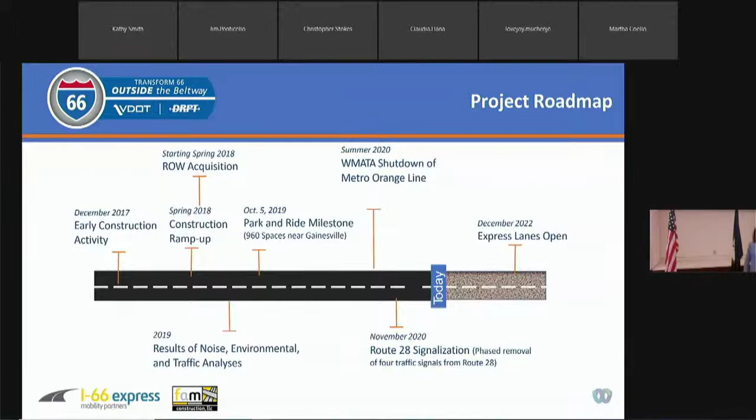We're also improving bike and pedestrian crossings across this bridge. We're building this bridge in two phases to be able to maintain traffic throughout construction. The first phase of the new bridge opened to traffic in November of last year. Then shortly thereafter, this past winter, we began demolition of the remainder of the old bridge. Construction of the rest of the new bridge is underway, and we anticipate completion by spring of next year.

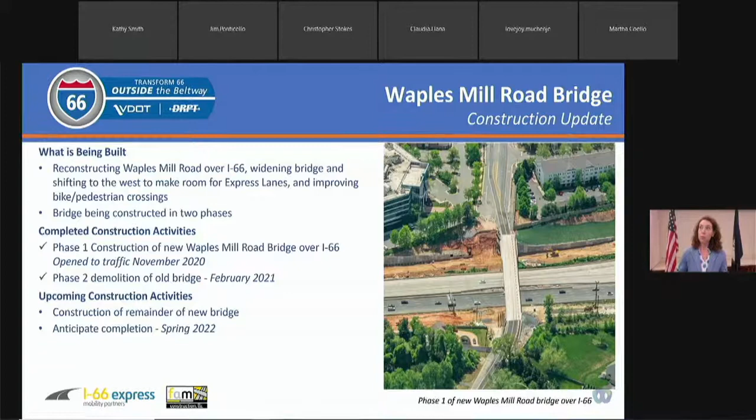Just to the west is the Route 50 interchange, and you may have heard news about this interchange over the weekend. If you live around this interchange, you'll want to call special attention to many of the changes that have recently been implemented.

But first, as an overall, we're looking here at the image of two new Route 50 bridges over I-66. The image you see is looking towards the south over top of I-66. We're reconstructing the entire interchange, shifting it slightly to the east, and accommodating the widened highway underneath, as well as new ramps to and from the express lanes.

So far, as you can see in the picture, we've constructed new bridge decks over I-66 and are working to shift the roadway alignment for both Route 50 East and West. Just this past weekend on Sunday, we opened up the new Route 50 West Bridge to traffic.

And then beginning tonight, as an upcoming construction activity, we will begin demolition of the old westbound bridge. In a couple weeks, around July 10th, we will shift traffic on the Route 50 East bridge to the new traffic pattern, and then begin demolition of that old bridge.

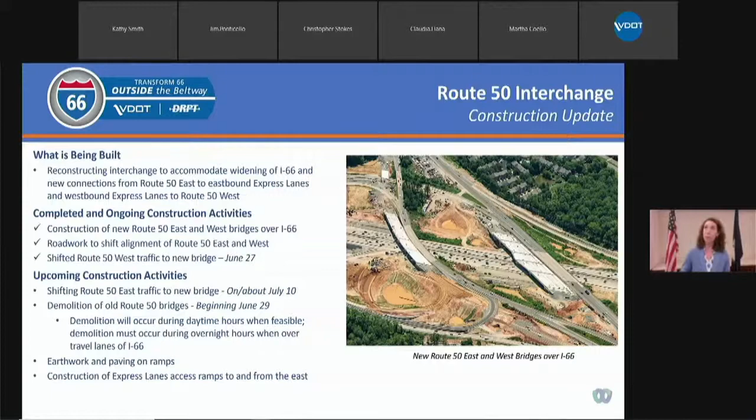Moving west at Monument Drive, prior to the project, the ramps to Monument Drive from I-66 were HOV-only ramps. When the project is complete, we'll be opening Monument Drive to full-time express lane access ramps, both to and from I-66 east and west. Additionally, Fairfax County, with project concession fee funding, is also building a new parking garage on the south side of I-66, just next to Monument Drive Bridge.

In the photo you see here in the center, on the lower half towards the bottom of the picture, is Fairfax Corner shopping area on the south side, and the ramps you can see in the center of the screen heading to I-66 east and from I-66 west.

To add the new access ramps on the west side of the bridge, we are expanding this bridge. You can see in the picture on the west side, or the left-hand side of the bridge image in the center, the beginnings of new bridge foundations on the outside of the highway.

Upcoming activities you'll see in this area are continued construction on those new bridge abutments, but the remainder of our work to widen this bridge will take place after we've shifted traffic on the general purpose lanes through this area this coming fall.

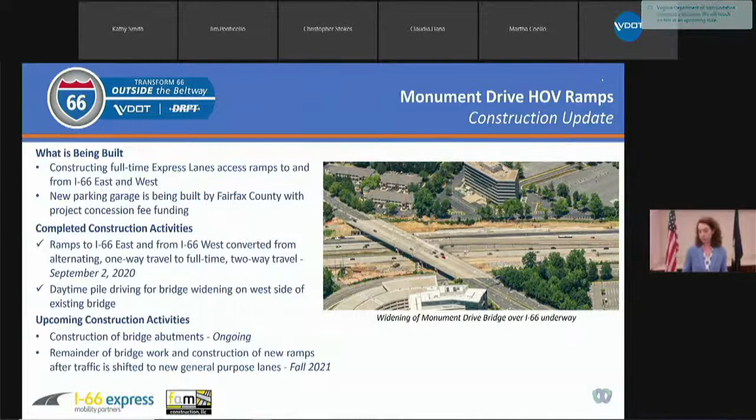At the Fairfax County Parkway, the image you see here is driving under the I-66 bridges over top of the Fairfax County Parkway. We are expanding the I-66 bridges that run over the Fairfax County Parkway.

Prior to current activities, we did partial demolition of the outside portion of those bridges. We've constructed new foundations for the widened bridges and set beams for the new bridges. Going forward, we'll continue work on the new bridge decks in preparation to shift traffic on I-66.

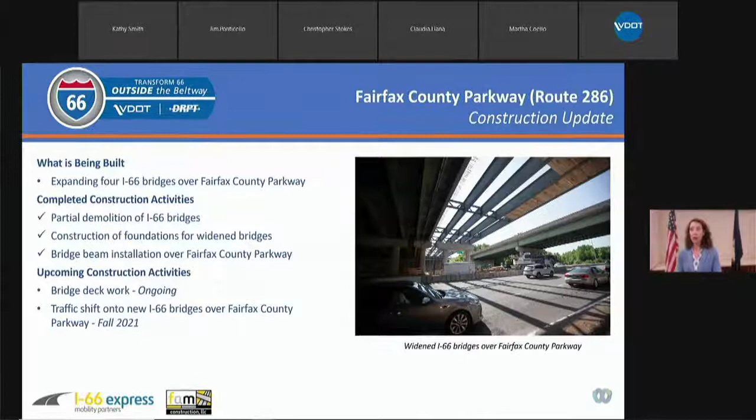At Stringfellow Road, the image you see here is looking towards the north.

You may recognize the park and ride lot at Stringfellow Road, off to the upper left-hand side of the bridge for orientation. You can also see, parallel to I-66, the makings of two new bridges over Stringfellow Road. We set these bridge beams over this winter and spring, and deck work is well underway here.

For this crossing of I-66, we are pushing I-66 out to make room for new express ramps to and from the east and the center median, as well as to make room for future transit down the center of I-66.

Upcoming activities you'll see in this area over the coming months: as these bridges are completed, we will begin to shift traffic on I-66 east and west onto these new outside bridges in the late summer and early fall timeframe. Once we shift that traffic, we'll then begin to demolish the old bridges.

As with Route 50, this demolition work will need to occur during overnight hours when we are working directly over the travel lanes of Stringfellow Road. As with all our demolition activities, we'll do public outreach prior to the start of demolition so that neighbors living in the vicinity are well informed beforehand.

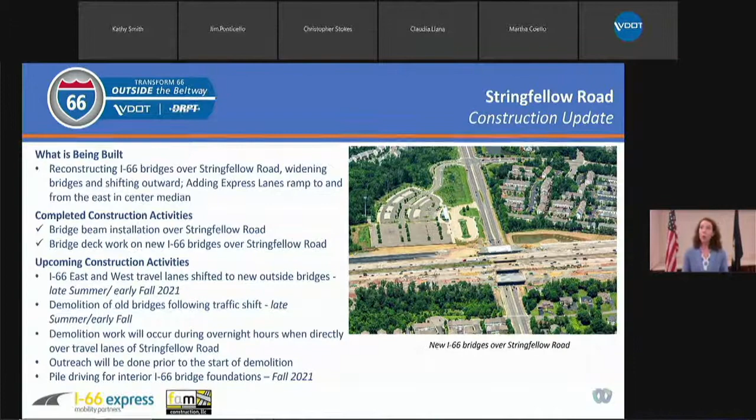At the Route 28 interchange, probably one of the most complicated areas of the project, we call this our mini mixing bowl for those of you familiar with other parts of the region. Here we are reconstructing the entire interchange to accommodate new connections for the express lanes and the widened highway.

As Susan mentioned, we met some major milestones last fall with removing the traffic signals, the 4 remaining traffic signals along this portion of the 28 corridor. In order to remove those signals, we opened up several new ramp movements to provide new access.

In general, we opened up new access from I-66 East to 28 North, from 28 South to I-66 East, opened a new ramp from I-66 West to 28 North, and also opened the new Braddock Road, Walney Road overpass and ramp from I-66 West.

This past spring, we partially demolished the existing Route 28 South Bridge over I-66. And just this past weekend, we opened the new permanent ramp to I-66 West from Braddock Road and Walney Road, along with some additional movements for Walney Road.

I'll go through those in more detail in a second, but I want to point out some upcoming construction activities that will be noticeable as you travel around this interchange, or for those who live in the vicinity. This summer, we will begin to install bridge beams and start construction of the new 28 South collector distributor lanes over I-66.

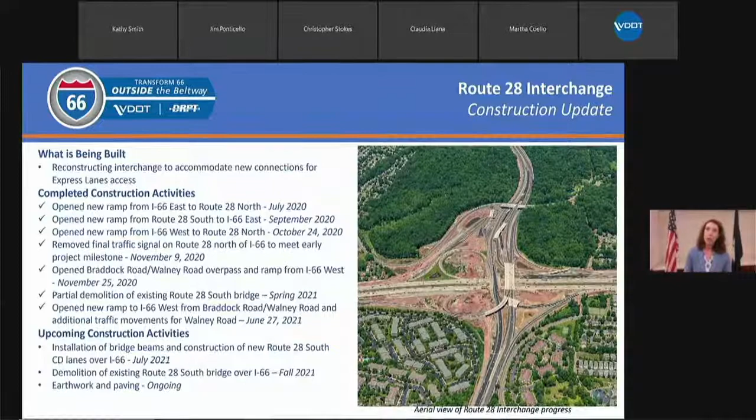I mentioned some new traffic patterns and new movements that began this past weekend on Sunday, the 27th, for Braddock Road and Walney Road. We activated 2 new traffic signals on the Braddock Road, Walney Road overpass, and that allowed for new movements to occur. The first is that we were able to open the new permanent ramp to I-66 West from Braddock Road and Walney Road, so that's new access for Walney and Braddock Road drivers.

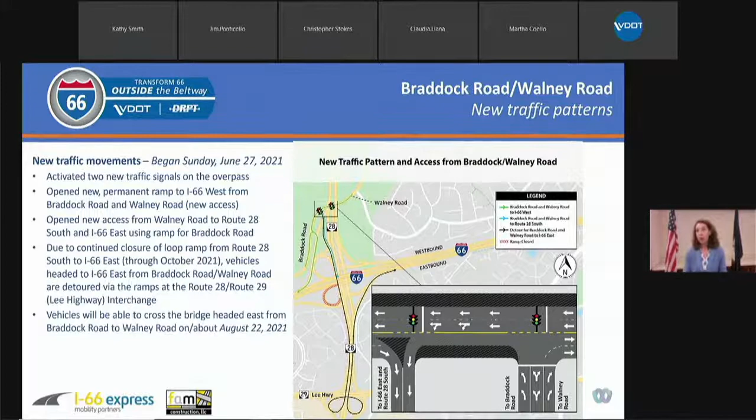Here, that detour I just mentioned, you can see in a bit more detail. We have temporarily closed the ramp from I-66 West to Route 28 South, beginning this past Sunday. This closure will allow for construction of the new permanent ramp, and during this closure, we're directing traffic to take the exit from I-66 West to Braddock Road and Walney Road.

Make a left at the traffic signal at the top of the ramp, stay to the left, and then make a left at the second light onto Route 28 South. The ramp from I-66 West to Route 28 South will reopen on the weekend of August 20th.

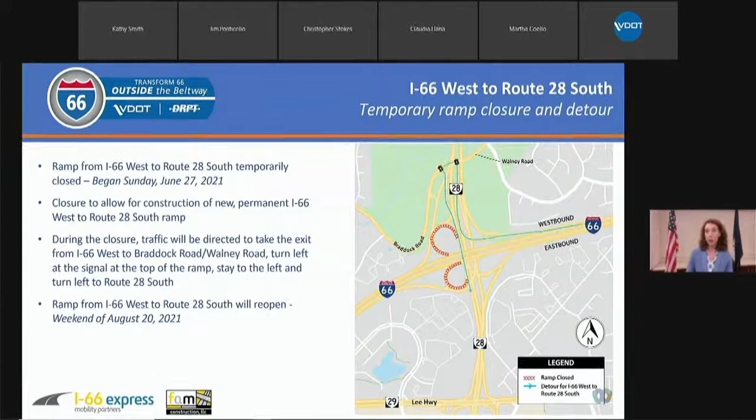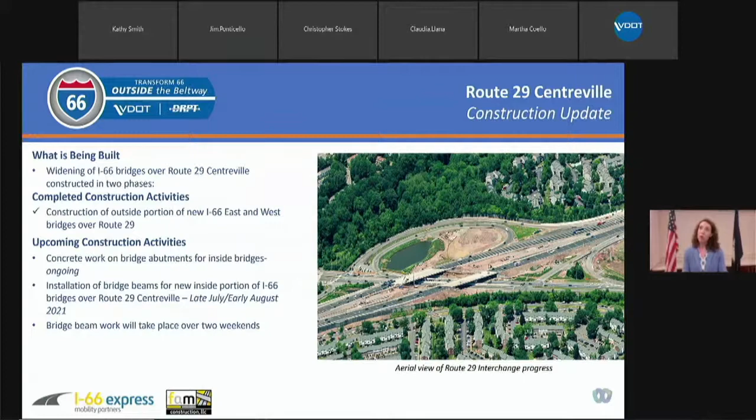At Route 29 in Centreville, we're widening the I-66 bridges over Route 29, constructed in 2 phases to maintain traffic on I-66. We're also expanding I-66 to make room for future transit in the center median of the corridor. Construction of the outside portions of the new I-66 East and West bridges over 29 was completed, and traffic was shifted onto those new bridges at the end of 2020.

Currently and upcoming, we're continuing work on the inside bridges, and we're looking to install bridge beams on the inside portion of the I-66 bridges later this summer, in the late July and early August timeframe. Those bridge beam installations will take place over 2 weekends during that period.

In the image on the screen, for some orientation, north is towards the top of the picture, so we're looking roughly northwest, with the I-66 eastbound lanes heading towards the right-hand side of the image.

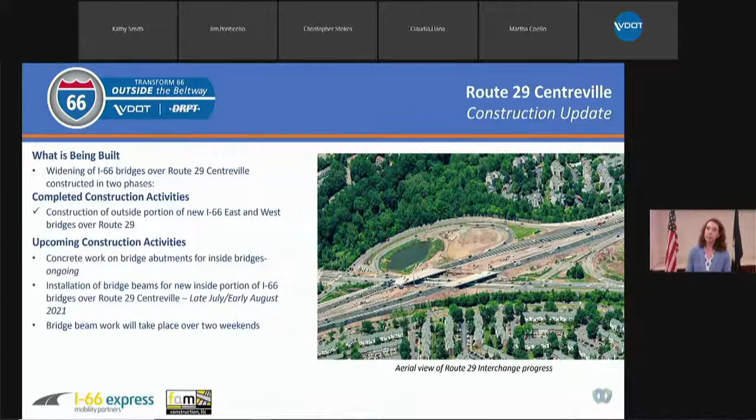In addition to all the work on the various crossings and interchanges throughout the project corridor, as you drive the corridor you're seeing a lot of work on I-66 itself. Today our focus is on shifting I-66 east and west onto the new general purpose, or outer, lanes in various sections.

This focused work began this past spring and will continue through fall of this year. On the far western portion of our project corridor between Route 29 Gainesville and just west of Route 29 Centreville, we are working to get the travel lanes shifted on both I-66 east and west by the end of this month. In just 2 more days we look to have all the travel lanes in that area shifted to those new outer lanes.

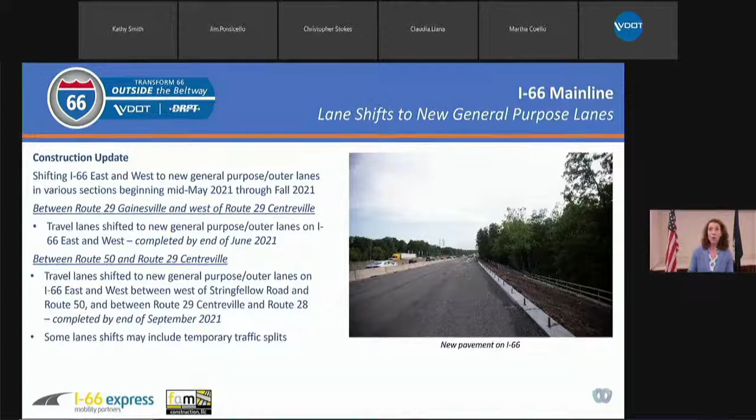Those will be the new permanent general purpose lanes along both I-66 east and west. Between Route 50 and Route 29 Centreville, we're also working to shift travel lanes to those new general purpose or outer lanes on both east and westbound, and that will be done in various sections throughout the summer and into the fall timeframe. In some areas where space is more constrained, the lane shifts may include temporary traffic splits, and I'll go into detail on one of those areas coming up in the next few slides.

On I-66 East, between Route 29 Centreville and Route 28, we will be shifting traffic on or about the weekend of July 10th. When we implement this traffic shift, the 3 left-hand travel lanes will continue in their same configuration as today. However, the rightmost lane will shift to the outside and be separated from the 3 left lanes.

As you see in the image here, there are 2 call-out boxes at the bottom. The leftmost box shows the area as you approach where the traffic shift is. The left HOV lane and the 2 left general purpose lanes will continue straight as they do today, and the rightmost lane, which is also the lane you'd take to exit to Route 28 North, is shifted to the right and separated by a work zone.

Traffic will remain in this configuration for approximately 6 weeks while construction progresses in the area to prepare to shift all travel lanes to the outside. That lane split would then be shifted to the outside lanes on or about August 20th.

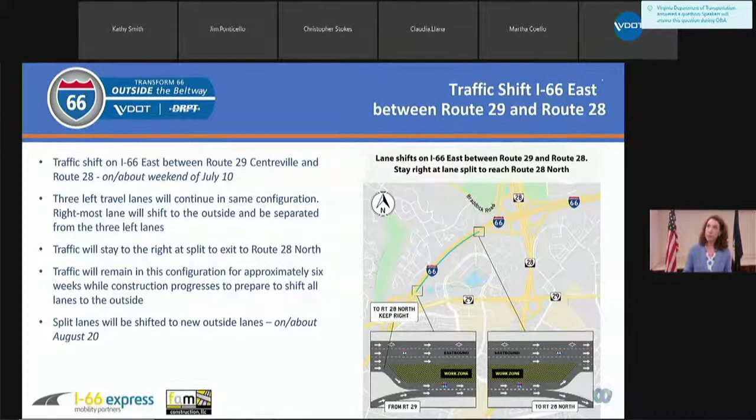Here you see a cross section of what that would look like from a driver's view as you approach the area, with 3 travel lanes to the left and 1 travel lane to the right, which is also your exit lane to Route 28 North. The rightmost lane you see here, the auxiliary lane, is the ramp coming off of Route 29 Centreville onto I-66 East, and the ramp going to Route 28 North.

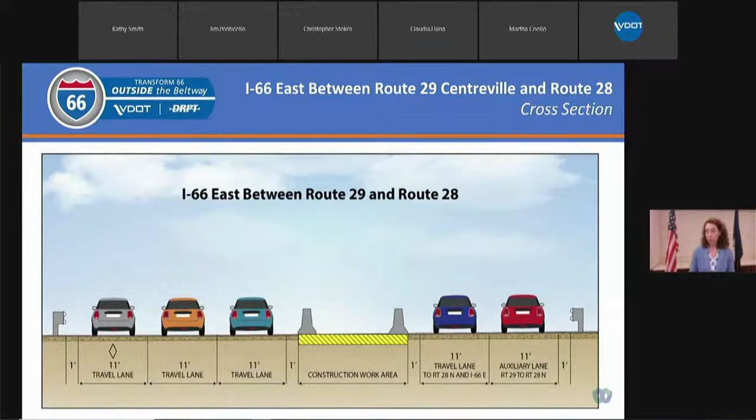Our construction along the I-66 mainline obviously includes more than just roadway paving and widening. We are also working on constructing retaining walls and noise walls throughout the corridor. Throughout the summer and into the fall, you'll see continued noise wall and retaining wall construction along I-66 East and West from the Route 29 Centreville interchange area through Waples Mill Road.

We've had some delays in material supply, namely steel posts and panel production for noise wall panels throughout the corridor due to COVID-19, and our crews continue to work to get new noise walls installed as quickly as possible. Other work you'll see includes grading for the shared use path being built as part of the I-66 project along I-66 West, and finishing final grading and drainage on the non-highway side of those new noise walls.

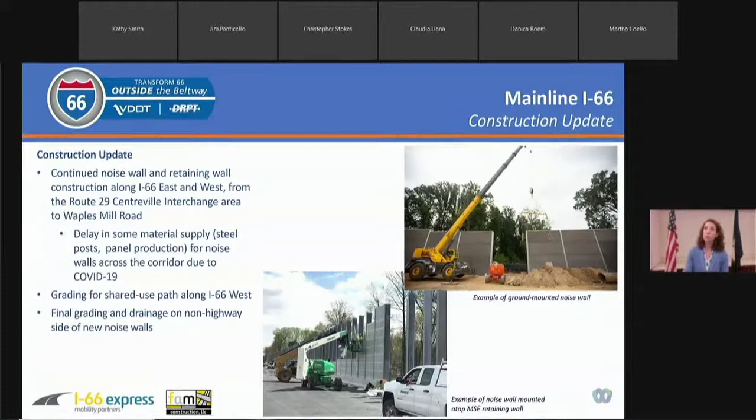As part of the project plans, we do have revegetation plans for the project corridor that were developed by the project construction subsegment. The final approved plans will be available on the project website, outside.transform66.org. The plans do include indigenous and non-competitive species and plants that are adept to living along a roadside environment, so more of a hardier species.

But the replanting of any trees would occur within VDOT right-of-way where we have space available and where there are no restrictions from easements or other utilities. Any revegetation along the corridor will occur as a final construction item.

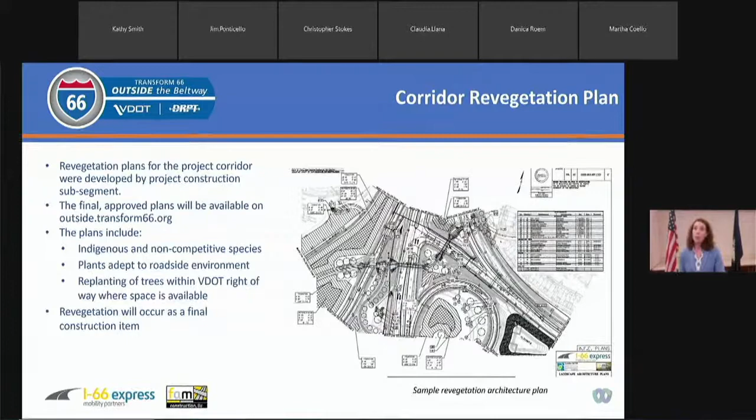Due to the cicadas brood X this year, we had delayed any revegetation plantings until this fall in areas where we are ready for revegetation. But this is a final construction item so that we don't have to come back and potentially remove plantings if we need to do some additional work in an area.

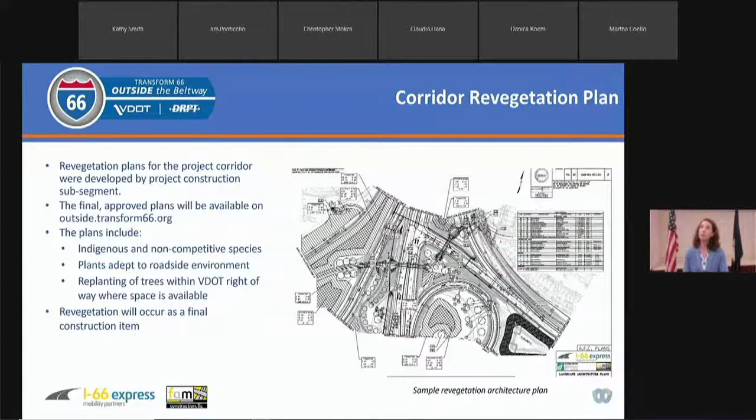So I think before our Q&A, we just wanted to make sure that you had all the information and are aware of all the tools that are available for you and the public to be able to get information and keep updated on the project.

We have a very robust project website at transform66.org. On this website, you'll find information on lane closures and traffic pattern changes updated weekly or more frequently. We also have section pages for all of the 19 interchanges, overpasses, and various features along the project, as well as a project interactive map and much more.

If you've not been to the project website in a while, I highly encourage you to do so. It's a great place for information. And if you've never visited the project website, please do. We send out emails every week with upcoming lane closures and traffic alerts for work coming up in the next week.

And that's a great way to stay informed about travel impacts for the project. You can sign up to receive these e-blasts right from the project website. VDOT Northern Virginia District's Twitter feed is also a great way to stay up to date on what's happening right now out along the corridors throughout the region, but also where reminders and updates are posted about work that will be coming up.